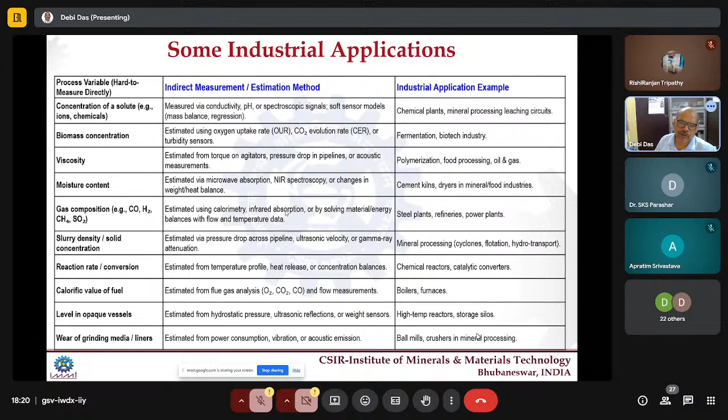So for doing the soft sensor, as I told you, you have to take physical sensors, which are not directly related, but they are interrelated, and those sensor signals are captured by a computer. Once they are captured, then you have to do some signal processing. The signals coming from conventional sensors are required to be processed by using some algorithms. They are called signal processing algorithms. So what is the purpose?

If there is a noise, you have to remove it. So that is done by filtering. You can extract features. Suppose a signal is coming, you can know how much is the high frequency component, how much is the low frequency component, what is the mean of the signal, what is the standard deviation of the signal.

Okay, so there is statistical information, there is some signal processing information. You can use Fourier transform or Wavelet transform or PCA to extract information. Then so many sensors are there, then you have to add them, that's called data fusion.

Then if the data has got a drift or fault, that also has to be identified, because the soft sensor is very intelligent to know that the data which is now coming is faulty. Maybe the sensor which is attached is loosened, the nuts and bolts are loosened, that is why the signal is not coming. So that is called fault. It has to detect it. It should not process a faulty signal and give wrong information.

Okay? Dynamic modeling and state estimation: with respect to time, it will model and handle the time varying process. Suppose now something is happening, after some time the process will be different, therefore a time varying process. So there are some autoregressive moving average models, so they can estimate the internal states.

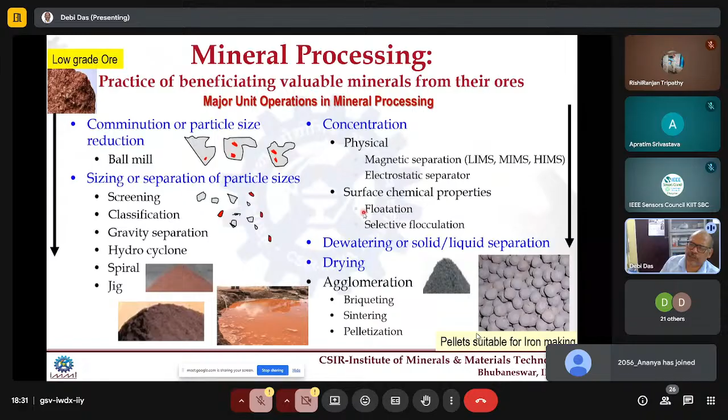Dewater means remove the water from this, so that by the process of drying, you make again powder materials like this. And these powder materials will be made into very spherical balls. The spherical ball size will be 8 mm to 16 mm required size, and they are the pellets. Now these pellets can be used in the blast furnace. But the whole process requires a lot of processing. Okay? You can separate using magnetic separator, electrostatic separator, flotation, selective flocculation, all these are processes.

So a typical flow diagram is like this. It is a raw material handling system, raw material. Then you have to crush it, primary process, then screen and separate the bigger and slightly smaller particles. Bigger will go to the secondary crusher, slightly smaller will come here. Put water, then again grind or scrubbing. Scrubbing means separating the clay material or something like that. Then whatever is the output, you put into a spiral classifier or hydrocyclone. They will separate the lighter fines, rejects, and the concentrates.

Okay. Then you use a magnetic separator to separate something. You have spirals, you have many operations. Then you will have lumpy iron ore parts, you have very fine ores, and you have pellet fines, which are suitable for pellet making, spherical ball making. So this is a process which is regularly used in industry. Depending on the ore, these process steps may change.

And this one is called pelletization. From the fines, there is a circular disc that rotates, and the fines will be converted to spherical balls. They are called green pellets. Then they go into a furnace of high temperature, about 1300 degrees, to harden them. So hardened spherical balls are called indurated pellets, and they are actually called product pellets. So from the raw material to product pellets, there are different processes. They are called mineral processes.

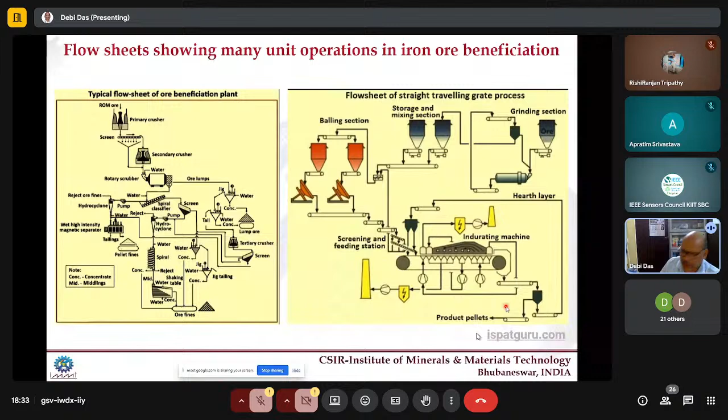Okay, and the product pellets can go directly to blast furnace, and you can get iron from there. So for grinding, you have grinding mills. Okay, but what are the issues while grinding? Suppose you have a grinder at home, you are grinding. So when you are grinding, your mother or whoever is using, they will be able to know from the sound whether the grinding is complete or not complete.

Okay? Similarly, inside the ball mill, whether the grinding is complete or not, can we know from the vibration? Whether the blade of the grinder is broken in the home grinder. In the ball mill, whether the balls inside the grinders are worn out, can we know from the vibration? Can we know from the power drawn by the mill? So they are called the soft sensors. So this is inside of a ball mill. So there are a lot of balls inside.

These balls actually rotate along with the material, so that the red ones and blue ones are separated. Okay, they all are mixed, but they are dislodged from this, and then you have to do some kind of differentiation by classification and screening. Basically, classification using gravity or magnetic separator. Then, if these red ones are magnetic and these are non-magnetic, then magnetic separator will be used.

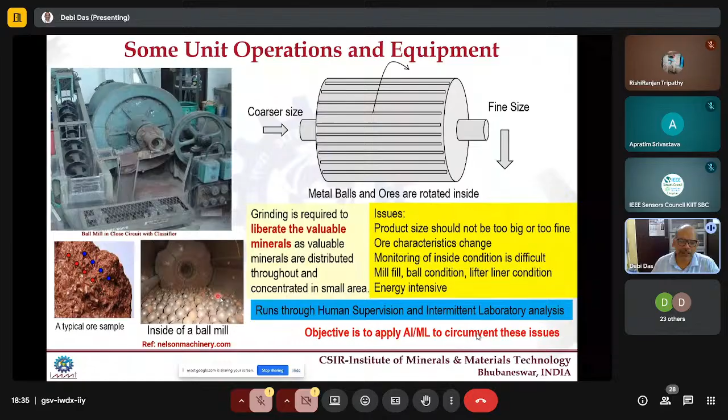If they all are non-magnetic, then that is not going to work. So you have to use some other process to remove. You can use flotation by putting some kind of chemical. You have to float it and separate. So all these are different types of processes.

Now, like doctors put a stethoscope on our body and know different parameters about our information. So can we put a stethoscope on a grinding mill, like the vibration of the mill we detect and know a lot of information inside the mill. So what we did in our experiment in one of the cases, monitoring the fill level of the ball mill using vibration.

Means when the ball is there, material is there, what is the level of material, whether it is half full or less than half, or 10% or 20% or 30% or 40% or 50% full or more than that. Can you know while it is running from the vibration signal? So it requires a soft sensor. We cannot do it by any other method.

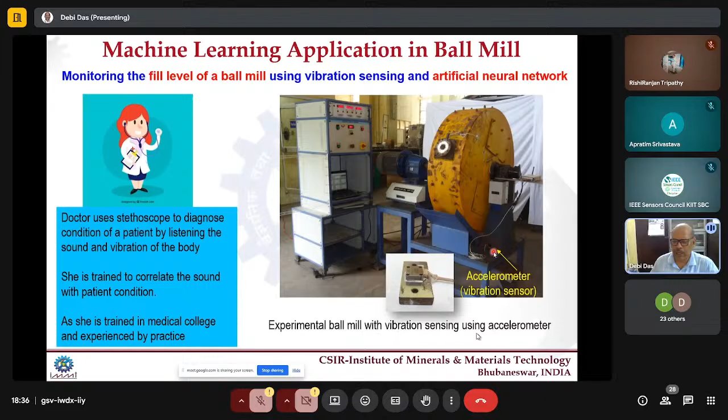Okay? So for that, what we did is we put a vibration sensor, and the vibration sensor is nothing but an accelerometer, and the accelerometer signal looks like this. So it is a triaxial accelerometer. This signal looks noisy. So handling so many signals is difficult.

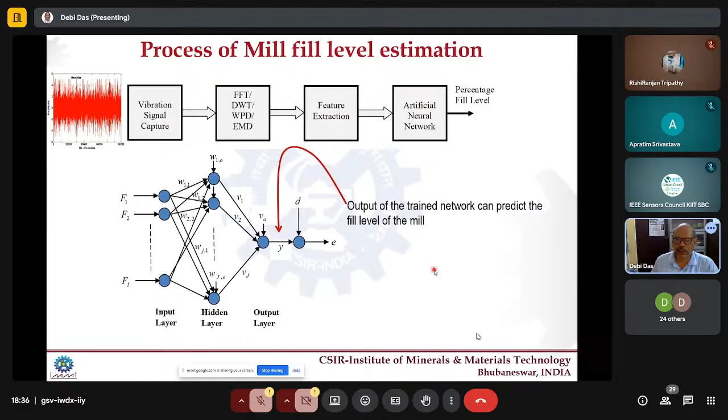So you have to extract the features using Fourier transform or DWT or WPD or EMD, and we extract 10 features or 11 features or some high number of features. Okay, they are numbers. So if this input is given, 10 numbers will be out from here, and a neural network is used to train. And once we train it, then from the vibration signal after the feature extraction, it is able to estimate the fill level.

Then another, as I told you, inside the fine slurry there will be some highly concentrated things, means high density items, and there are some low density items. Like, cyclones are there. When a super cyclone comes, which items are flown away? The lighter items are flown away. Heavier items are kept at the bottom. So that is called a cyclone in the atmosphere.

Now it's called hydrocyclone. When the water is going in a tangential direction in a conical apparatus like this, they rotate cyclonically so that heavier will go down, lighter will go up, and they are separated by this. Okay, so by this heavy and light can be separated. But what happens sometimes, because this is a narrow outlet, sometimes they get choked.

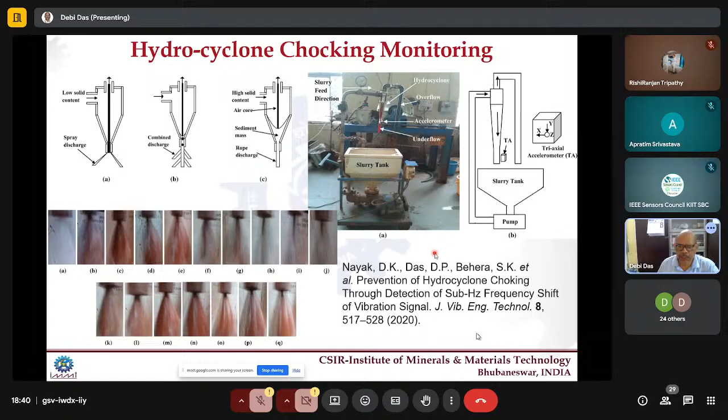Difficult. Okay. So slowly, slowly we increase the concentration, then we decrease the concentration. We find again it is coming to the spray discharge type. So this experiment we did for different known concentrations, and we captured the vibration. Then we plotted the fast Fourier transform, FFT.

And we found that when there is nothing there, dry run, water is not fed, there is a peak coming in the Fourier spectra around 21.2 to 21.3. Then as soon as we put water without putting any material, we found this particular peak is shifted left. Then we added a little amount of material, about 4%, and we found suddenly it got shifted.

So how did we get this information? Because we captured the vibration signal for all these varieties of concentrations. And then at home, we analyzed by taking the Fourier transform and zooming the area. Around this area we zoomed and we found that this particular peak is shifting. Then we correlated and found that if the concentration is increasing, this is decreasing, and around this concentration, choking happens.

So if we are supposed to run at this particular concentration, maybe the blue one, or maybe this purple one, and suppose there is a shift towards the left side, then immediately we should alarm that choking is going to come. Don't increase the concentration. Put some water and dilute it. Okay?

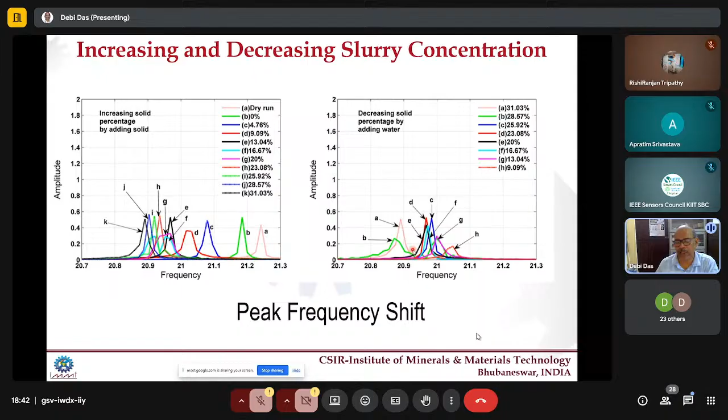So this shows that by doing signal processing we are able to check the frequency and check the slurry concentration, as well as understand the choking. This is a soft sensor. Another frequency range, 40 Hz and 60 Hz, is also coming because of the harmonics. So 20 was there, and the first and second harmonics are in the 40 and 60 range.

So next, another process is called plasma processing, where we are feeding argon and hydrogen inside a particular plasma reactor. Plasma is nothing but two electrodes. When you spark and give a gas of argon and hydrogen, this particular area will be ionized. Plasma is nothing but an ionized gas, as you know, solid, liquid, and gas.

And if you give energy to the gas, some of the elements or molecules get dissociated. Some elements will be ionized, meaning the electron is removed. Some will be excited, some will be in the neutral state. So electrons will be there, ions will be there, neutrals will be there. That particular area is called plasma.

So in one of our plasma experiments, we were using hydrogen and argon, and hydrogen is very risky, as you know. In case there is a leakage in the hydrogen pipeline, we cannot know, because the flow meter will show the hydrogen I have sent, but with a leakage in between, the proper hydrogen is not coming. So we thought, from the glow, the intensity of the light and the spectra of the light, can we know the hydrogen?

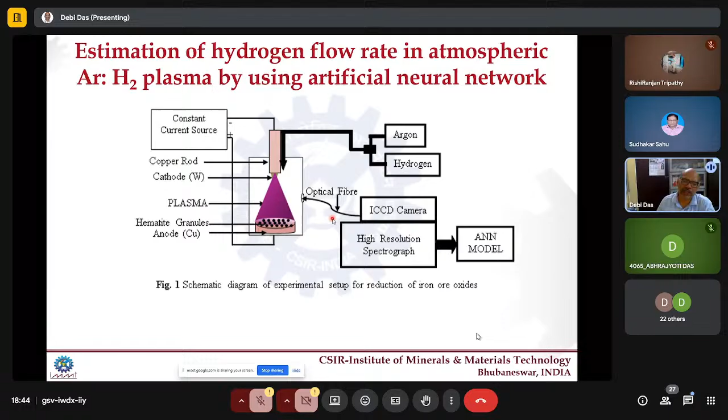Because when hydrogen is there, a lot of spectral lines will come. Spectral lines means, as you know, light has different wavelengths, and at each wavelength some peaks will be there. They are called spectral lines, and each wavelength corresponds to some element. And we have a very expensive high resolution spectrograph. So from the light of the plasma, we get the spectra, and from the features of the spectra, we trained a neural network to estimate the hydrogen flow rate.

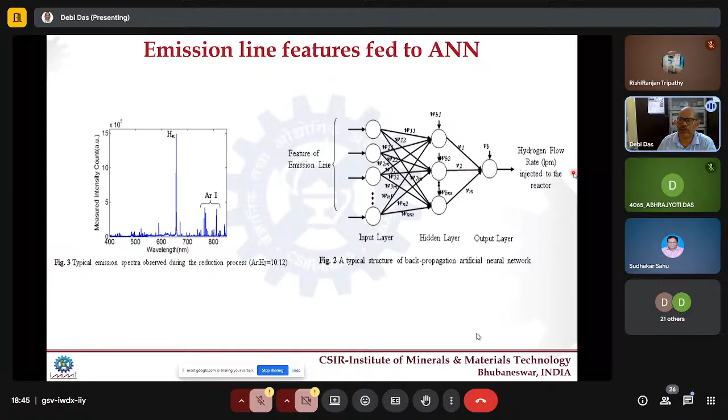So the paper is published in Neural Computing and Applications. You can see that actual is 5 liters per minute, and from the spectra also we are estimating 5. Here also 8, then 10 and 12. In all cases, we are almost estimating it to be very, very correct.

Okay, so this is a redundant sensor because already a flow meter is there for hydrogen. Why do you require it? Because this can be used as a redundant sensor in case the flow meter does not work. This can also give you the information, because this will give you the right final information: that the plasma is there, but hydrogen has not entered into the plasma.

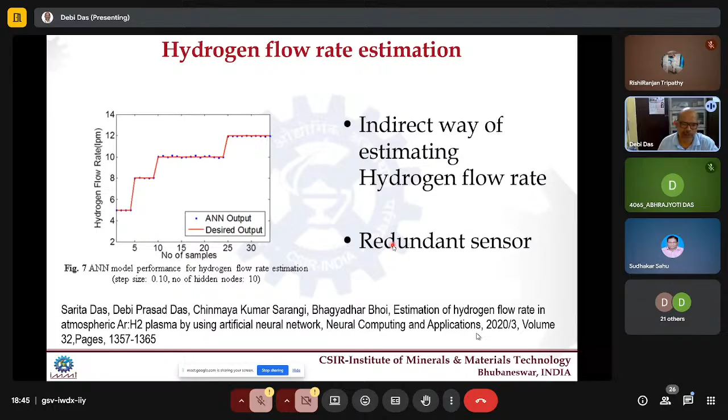So this is another plasma where there is a crucible type of electrode at the bottom, and there is a cylindrical electrode which goes inside and plasma is created. From the outside, can you know how much it has gone inside? It's not visible. So our objective is what is the cathode position inside the whole thing. There is no sensor for that. You cannot put a camera because it's very high temperature.

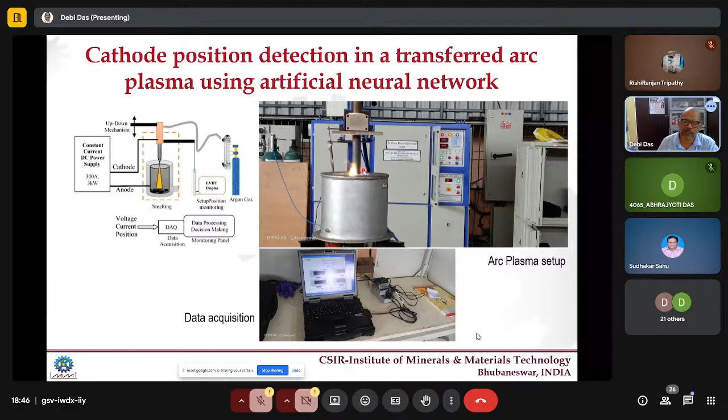Then we also use image processing. So these are sensor interfacing. Now, can we have camera-based sensors? Like doctors watch an X-ray or CT scan image and extract information. Teachers check your answer sheets. Engineers also see by their eye. Drivers watch and drive. So can we do the same thing, process monitoring, using image processing? They are called vision-based instrumentation, or vision-based soft sensing.

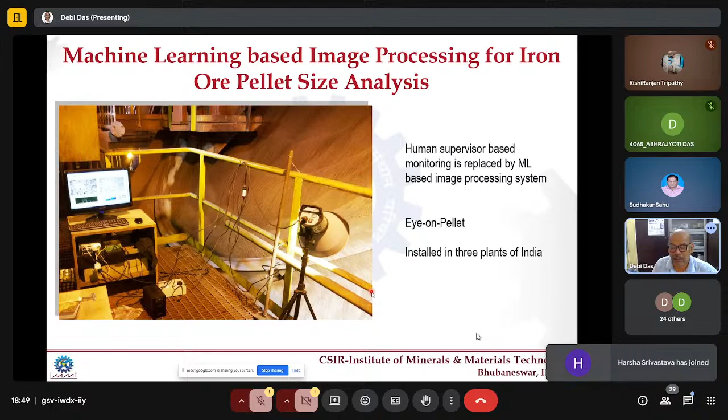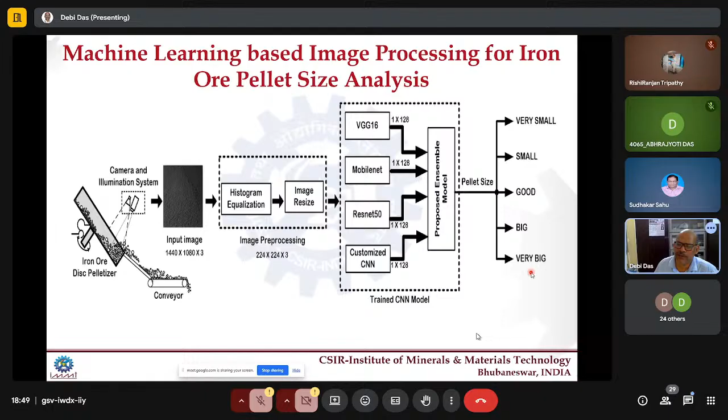So what we did is we captured the image, did histogram equalization, image resizing, and applied the CNN networks. Then we are able to know the size, like the operator is watching and finding out. We can do the CNN algorithm and say this size is very small or good or big or very big. So this is another application.

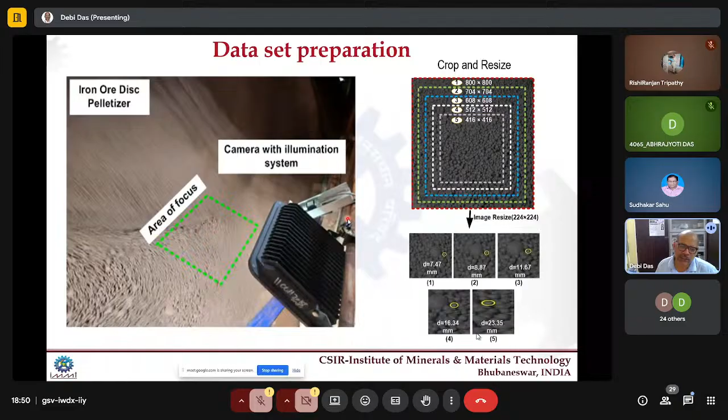So we capture the image from inside of the disk, and these are the sizes. You can also see from your naked eye. This can be called a big size, small size, and the lower one, number 5, can be called a big size. Though they are gradually increasing, still the image processing algorithm can tell. So they are also called soft sensor based size monitoring. When you use a classification algorithm, you have to have a confusion matrix; those are AI ML algorithm

performance metrics. Finally, you can see if it is very small, all the data are showing very small, but a very small amount of data they're saying as small. So little error is there. For the small cases, some are showing as good and some as big. They are the errors, so little error.

So we have compared with many algorithms like VGG16, MobileNet, ResNet, an ensemble model and a proposed model. The proposed model, you can see there is no problem at all. That is why it got published in two journals with different results: the IEEE Industry Applications Magazine and Neural Computing and Applications. You can refer.

So another objective is not just to know whether the size is big, small, or medium, but to know in the whole image how many pellets are within the range 12 to 16, how many are 8 to 12 mm, how many are greater than 16 mm, how many are less than 8 mm. So that they can know that not all should be 8 mm or all should be 16 mm. There should be a distribution of pellet size.

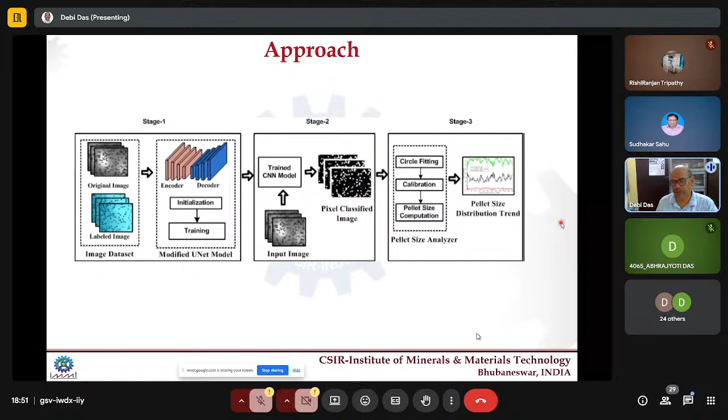For that we capture the image from the discharge, label them, create segmentation, use some kind of CNN network, and then we sort the pellet size distribution, and it worked very well compared with some existing algorithms. We used a modified UNet architecture. CNN has got varieties; UNet architecture is used basically for segmentation. Segmentation means separating the background from the object. Here the object is the pellets, the background is the white background.

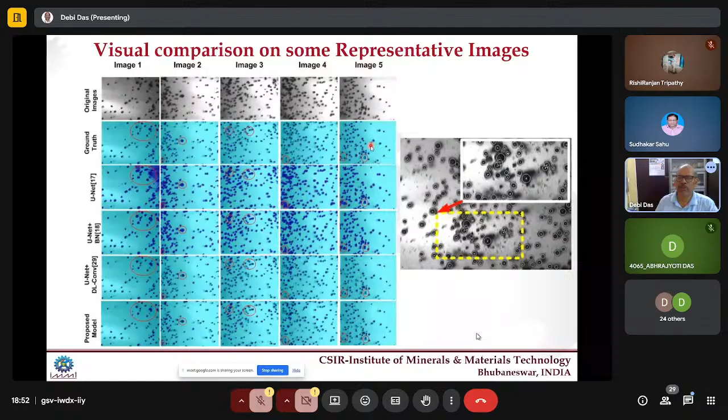So the image will come, and then we have to detect, count, and find out the size. Then we showed that the measured and our estimated values are in very close agreement in our algorithm compared to other algorithms. That is why it is also published in IEEE Transactions on Automation Science and Engineering. So this is also a soft sensor based size analysis method.

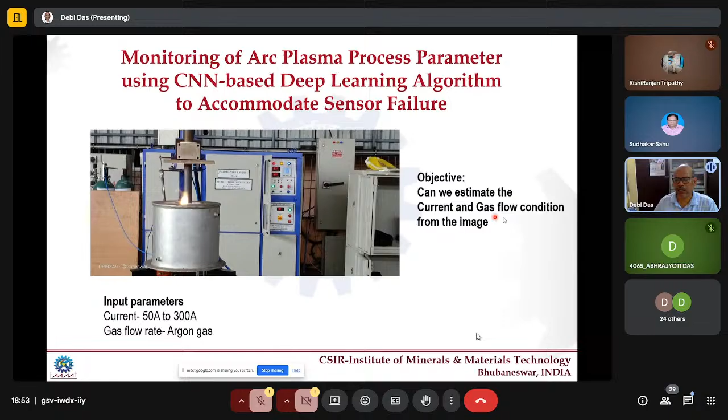Similarly, more work was done. This is a plasma. We put hydrogen gas and argon gas and we operate at different currents. By just watching the image of the plasma, can you tell what current it is running and what the gas flow rate is? That was our objective. Can we estimate the current and gas flow rate condition from the image? So we ran it with a known set of currents and gas and no gas conditions. No gas means no argon gas is put. If the gas is applied, 4 LPM, liters per minute, of gas is allowed.

We captured many images using an automated image capture scheme. These are typical images. We have 1700 images, but we have shown some 10 images here to show that when the current is increasing, say 50, 75, 100, how the image is changing. The glow is slightly increasing. At 50 ampere with gas and without gas, you can see the difference. When you apply the gas, it is more consistent. When you don't apply the gas, there is more reddish color.

So these are the pictures, but we have not extracted features from the picture. We just applied some standard CNN. We compared all the classes and did the classification. A lot of algorithms were compared, and we found that our algorithm has the best classification, which is also published in IEEE Transactions on Plasma Science. So these all are about our contribution to soft sensing and mineral processing.